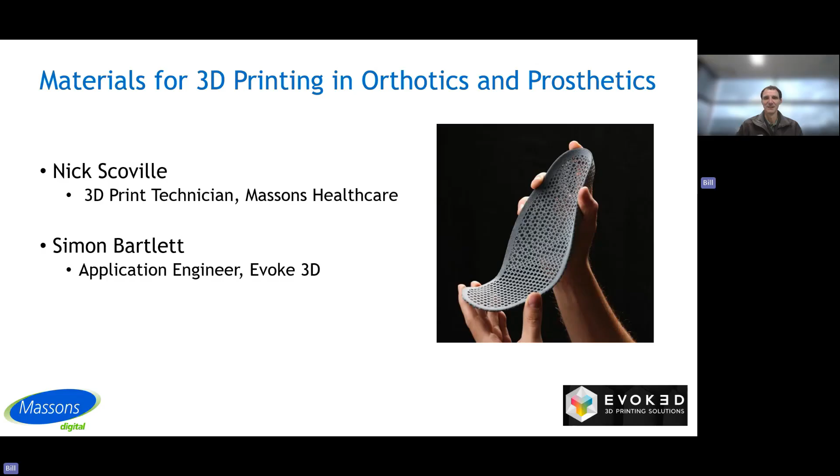I worked predominantly in the automotive industry for about 10 years and started 3D printing, started my own business about 25 years ago now, working with multiple technologies. But my key role during that time is to be a facilitator, to help individuals or companies take applications or ideas to market using additive manufacturing.

My role within Evoke is just that, working with potential machine buyers to make sure their application makes sense. Evoke itself is a supplier of end-to-end solutions for additive manufacturing. We do software with the likes of nTopology for digital workflows.

We are the sole agent for Australia and New Zealand for MJF, for HP technology, and then post-processing as well. We've got multiple technologies for vapor smoothing, which Nick will talk about, but also forms of mechanical finishing too. Something which we put a lot of effort into is servicing as well. As a machine owner myself and a business owner, I know the pain and the costs that machine downtime causes, so we spend a lot of time making sure servicing is at the front of everything that we do.

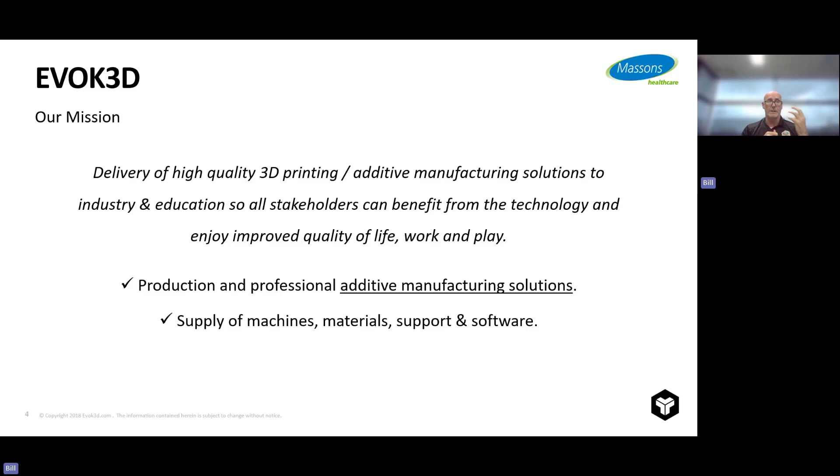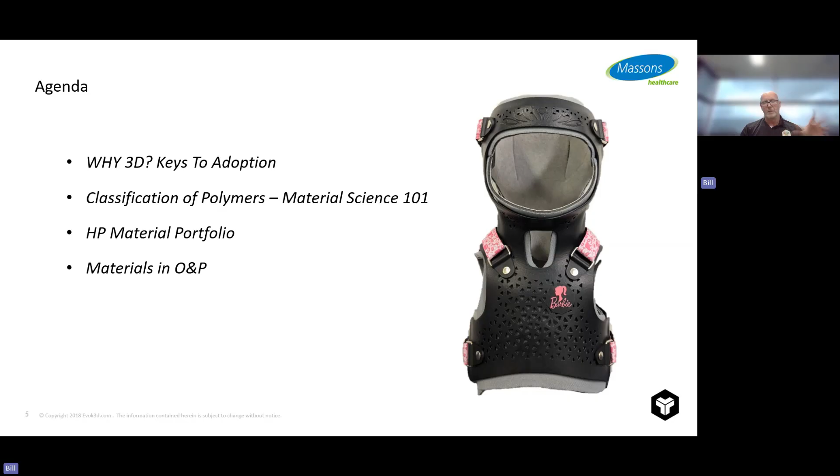So the agenda for today: what I'll be covering, and I'll do my best to try and make the science of materials somewhat interesting. Going through the keys for adoption, because we always need to be mindful of why 3D, the classification of polymers and a little bit of material science. We'll go through very quickly the HP material portfolio, and then also some of the work I've been doing in this field and the materials surrounding O&P.

So starting with keys to adoption. The last thing we want to do is actually replicate what you're actually doing now. So everything which we do when we talk about 3D, we need to think about value add, and the 5 key pillars to value adding.

So we talk about complexity. Remember, 3D printers are effectively a dumb machine, so they'll print anything that you've got. So part complexity does not, particularly with the HP technology, slow down or add print time.

Part consolidation - this is talking about doing more with less, so reducing part count. Anything which we can incorporate into the design to print as a single piece makes sense, again because complexity comes for free.

One of the key benefits too of 3D printing is being able to print on demand. So we're able to go from a push supply chain to a pull supply chain, and we can align with what production requirements are. The next one, enabling functionality.

Remember too, we can add lightness, so we can use lattice structuring etc. We can make areas thin or thick, so we have the ability to tune a part depending on the end requirements.

And particularly relevant to what we do in O&P is this personalisation and customisation - every part we produce is different. So it's always pertinent, when looking at adoption, to make sure you're not just replicating what you're doing now, but adding value. The more of these boxes that you can tick along the way, the more benefit you're able to bring by moving towards 3D.

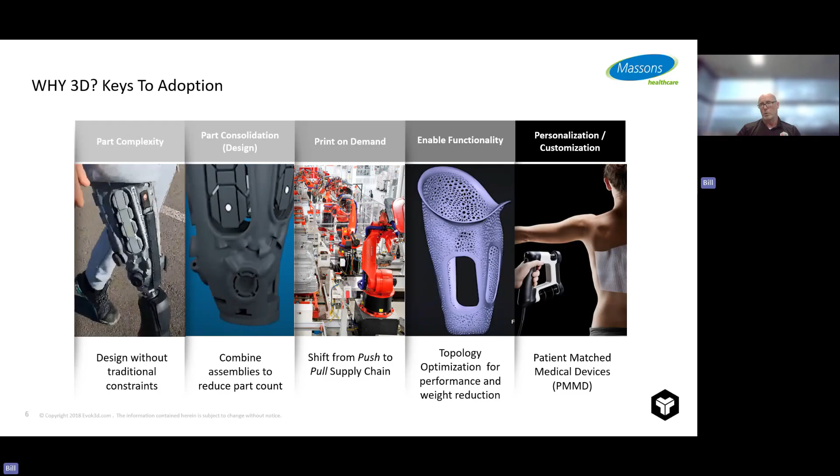Okay, the heavy part of today is talking about material science. So we're talking about polymers. For anyone versed in their Latin, polymer is broken up into two: poly meaning many and mer meaning units. So when we talk about polymer chains, it's actually a link of multiple mer, or multiple units.

So then we break that down from polymers, plastics, into thermoplastics, thermosets, and elastomers. And then we can break thermoplastics down even further, and this is where we want to focus today, into semi-crystalline and amorphous. Semi-crystalline examples are nylon, polyester, polypropylene, where amorphous materials are more your ABS, polystyrene, polycarbonates. We'll go down a little deeper about the differences between those two as well. And then over to our right, we're also talking about elastomers, so TPUs.

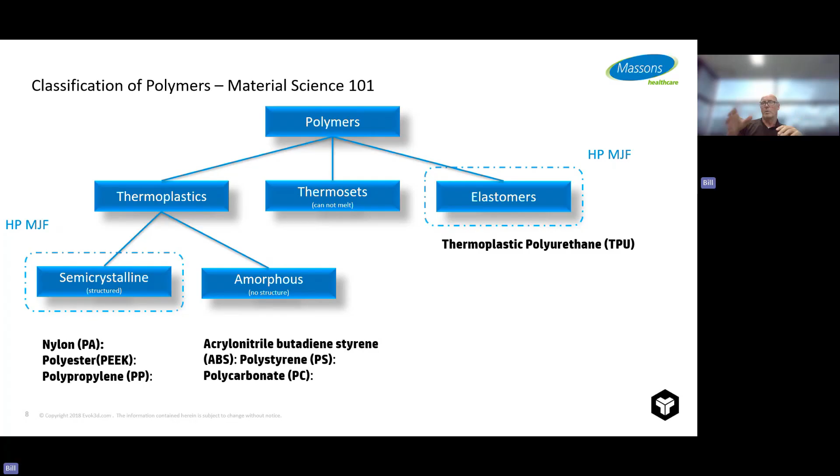So the technology which Massons have here, specifically we're looking at semi-crystalline materials, and predominantly the family of amides or polyamides, and also elastomers and TPUs. So again, the boring sort of slides, but it's interesting to note that the images you see there really do help to dictate or characterize some of the attributes of the materials.

So for an amorphous material, if you imagine, it's a random bunch of polymer chains. Now, one of the key differences is that amorphous materials don't have a specific or defined melting point, so they go soft and flow, whereas with crystalline materials we have a very defined melting point and glass transition temperature. Some other differences too, in terms of ductility and strength. Amorphous materials have a tendency of having lower chemical resistance, and they're quite often transparent too.

Whereas on the other side, our crystalline and semi-crystalline materials, these polymer chains, are a lot more uniform, a lot more ordered. Now, what is unique, they have a very good, or very controllable, window of their melt point. They have a lot higher strength and stiffness and wear resistance, higher chemical resistance as well, and they're generally opaque.

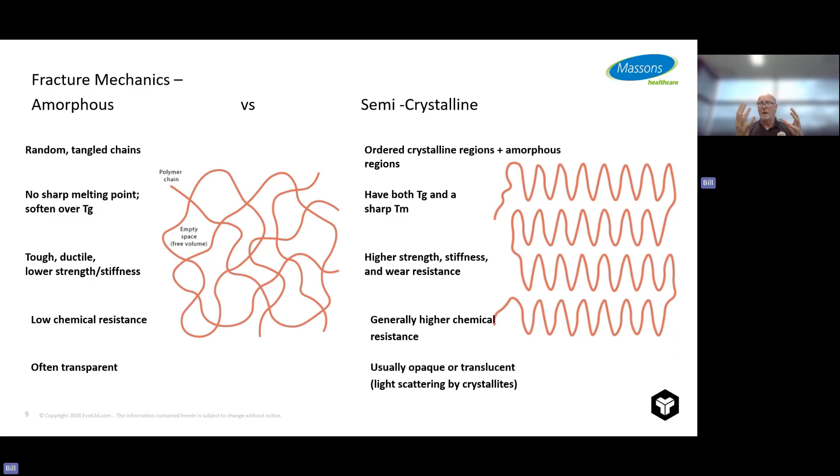Going into that a little bit deeper, it's mindful to just remember those graphics of the polymer chains. So amorphous materials like ABS, ASA is another one, have a tendency to shatter. And that makes sense too - if you imagine those polymer chains, when I'm applying a load, the load or crack as it propagates is going to go through those polymer chains to find the weakest links. So that's why we get a shattering approach, as opposed to a semi-crystalline material like nylon.

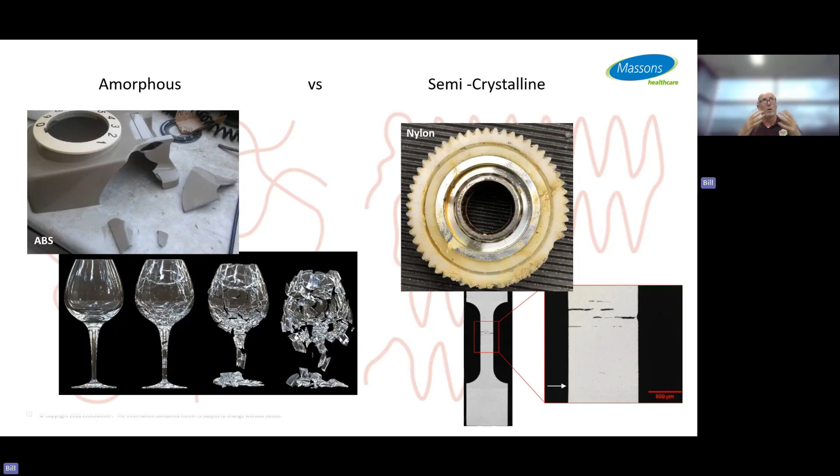And we've got a gear there - nylons are used extensively for gears. Here we have a very defined crack propagation, and that's also shown in that tensile test bar. So the crack actually propagates along that controlled, or ordered, structure.

Now, this is where it gets interesting. One of the things to remember from the earlier slides was having a very definitive, very defined melting point. This is why we use semi-crystalline materials in powder bed technology. For instance, the optimum operating window for polypropylene in HP technology is only plus or minus 1 degree, around 180 degrees. That plus or minus 1 degree makes the difference between being able to print a part and not print a part.

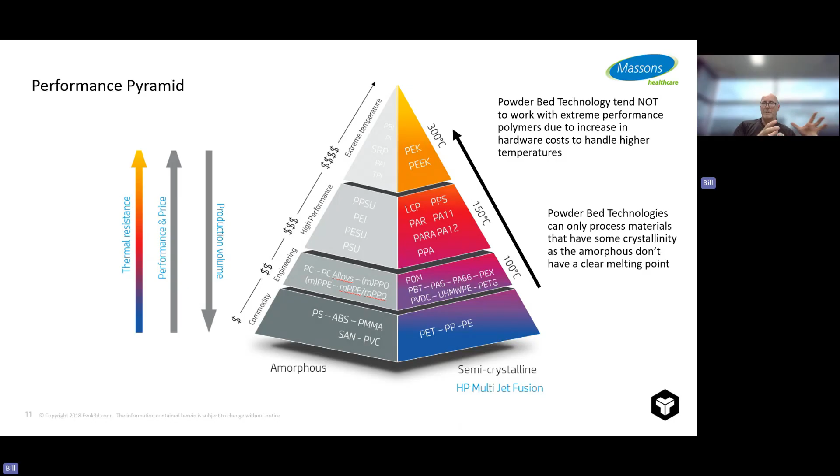That's not to say powder bed technologies can't move up this pyramid - they can print some of the PEK materials and PEEK materials. FDM is also very common for ABS and can also do PEEK. But what comes with that is machine complexity. If we need an operating envelope of around 300 degrees, that becomes a lot harder to control, and it makes the hardware itself a lot more expensive. So we have this rationale to use more commodity type materials, not only because they have a greater number of applications, but also because it influences the design of the hardware.

All right, having a quick look at time - regarding the material portfolio HP has for their technology, we have a range of polyamides, PA11s and 12s, etc. We have polypropylene, and we also have a white material now as well. Which material you end up using really comes back to the application, and we'll dive deeper into that.

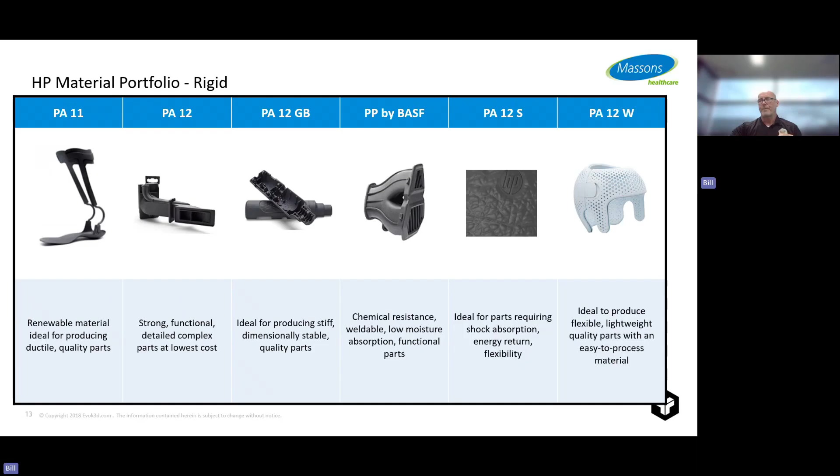When we talk about control with the HP technology, we can control a number of attributes in terms of temperature and agents, predominantly to give us different mechanical and physical properties too. For instance, looking at electrostatic discharge, we can vary the amount of carbon we're putting into the part, which allows us to dissipate a build-up of static, as an example.

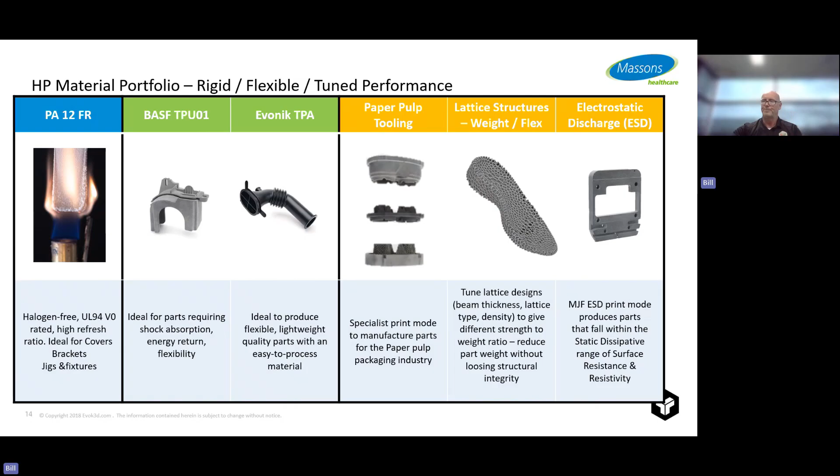But this is where we now start to get into the nitty-gritty, what I as an engineer typically term death by data sheets. Every material supplier, every hardware supplier will give you a telephone book of data sheets, but really the key is trying to digest all these materials and understand what they actually mean. One key takeaway from today is yes, data sheets are great, but it's actually understanding what's happening behind those data sheets.

So this is where we want to be in terms of thinking about if anything's got to flex or be stressed, etc.

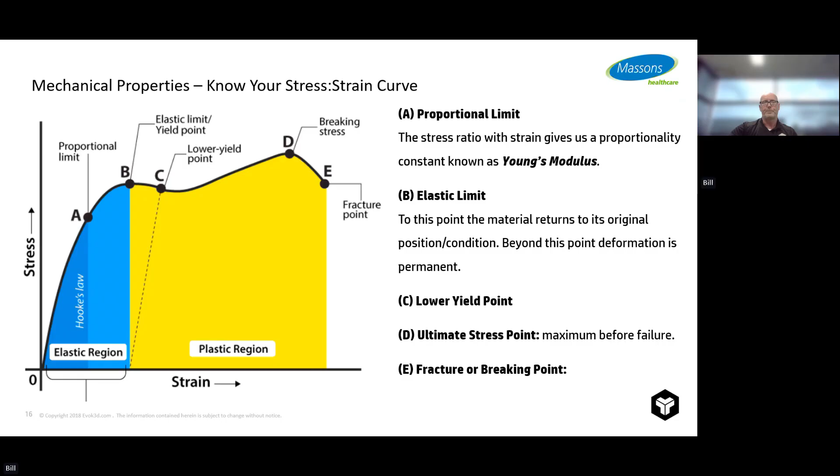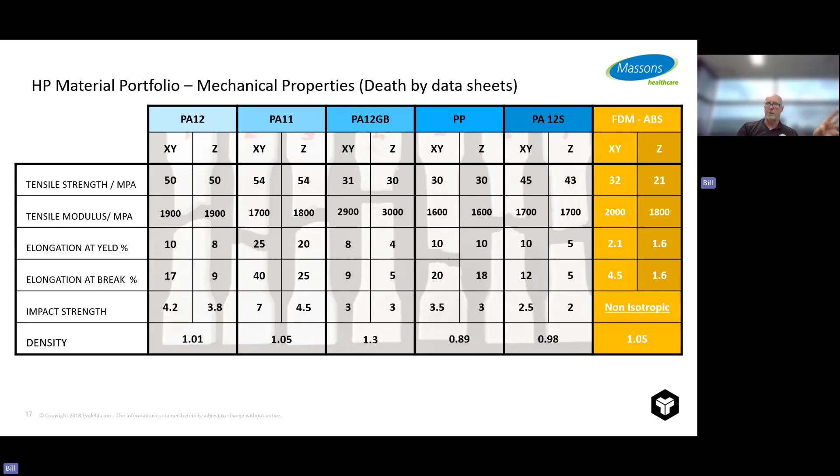One of the other things worth talking about, which I'll briefly touch on, is this death by data sheet. So we've got all of our mechanical properties for the HP, or powder bed fusion technology, polyamides. Then on the right-hand side, I want to show you an example from FDM, because I know a lot of people tuning in this morning will have FDM machines in their workshops.

Now, what's of particular note from this data is that with the HP technology and powder bed fusion technologies, you get very close or the same material properties in X, Y, and Z. That's what we call being isotropic. Whereas if you look at the FDM material, depending on the build orientation, whether X, Y, or Z, you see a 30% drop off in terms of tensile strength.

But then also, if you look at the elongation at break and at yield, you see quite a dramatic difference as well. It's actually lower, but a dramatic difference depending on the direction the part is printed, which becomes a lot more important, particularly when you're producing something like an AFO, where build orientation can have a dramatic effect on how the part performs.

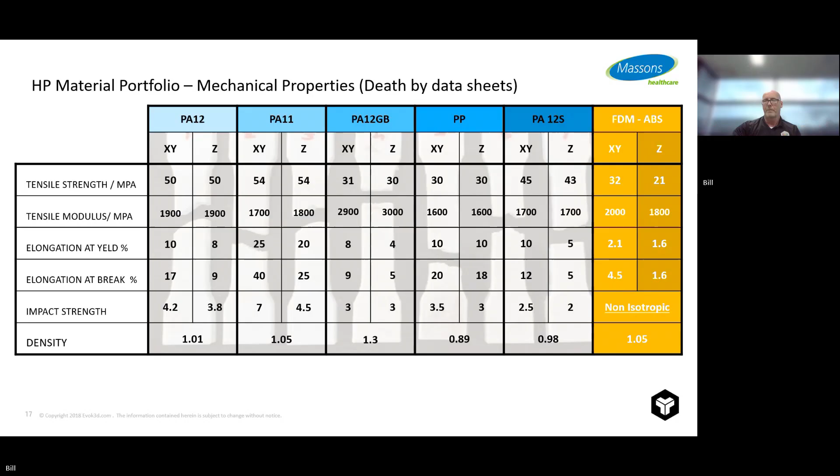But what does all this mean? Again, I'm a mechanical engineer, not a clinician. So how do I, on my day-to-day, when working with something like an AFO, think about this? I actually start on the right-hand side.

One of the things we've spent a lot of time on is building up what we call a finite element analysis, or the model. Effectively, once we draw something in CAD, we wrap a mesh around it, and with that mesh we're able to apply this stress strain curve at every node. Then we plug in the loads, to simulate load bearing and weight, and we're effectively stressing the part.

The area which is then highlighted there is an area common to what we call frog mouthing. If you look at the colour map, some of those areas shown in red, what we try to do is make sure those areas of stress are actually below what we see on our data sheet. So it's having a balance between the two, making sure anything we see on the data sheet is only going to stress the part within that elastic region.

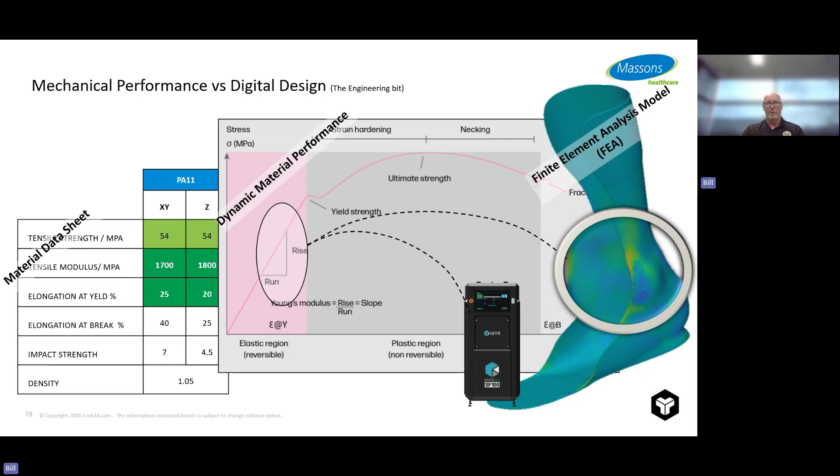And with that, if you want to know more about what I was just talking about, I'm actually presenting at DAOPA later this year, between the 16th and 18th of October, talking about having this feedback loop and testing.

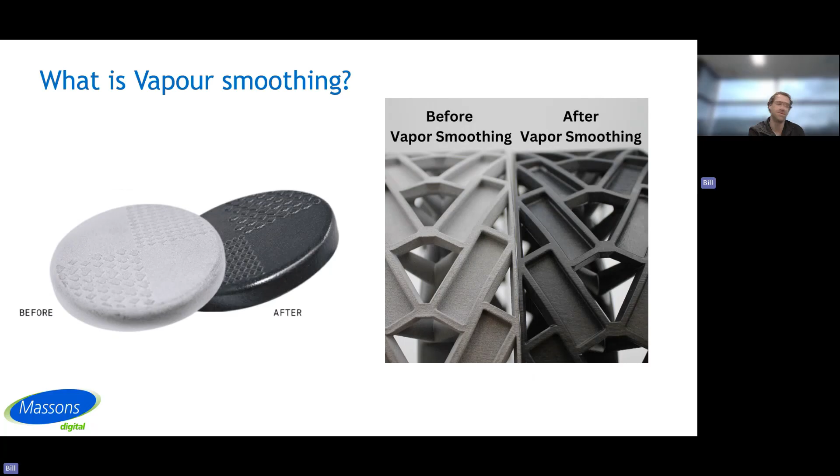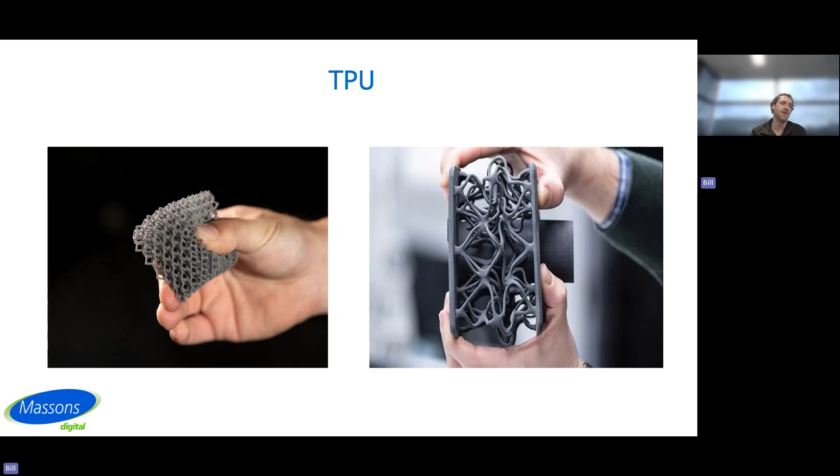First one that we print in is TPU. It is a rubber-like material that is very similar to flexible thermoplastics that we've used in O&P for years. It is the material that we print with that requires vapor smoothing to achieve what's known as optimal tear strength. So what is tear strength? Tear strength is also known as tear resistance, and it simply measures a material's ability to withstand tearing forces. In our typical applications here in the O&P industry, it's an important factor to take into consideration since devices in our field are really known for taking a beating.

The other material that we print in is PA11, and it is a high-performance thermoplastic derived from castor beans, known for its excellent mechanical properties, impact resistance, and its bio-based source. Unlike some other polymers, PA11 is known for its flexibility, making it ideal for parts like hinges, springs, or in our cases, AFOs and prosthetic devices.

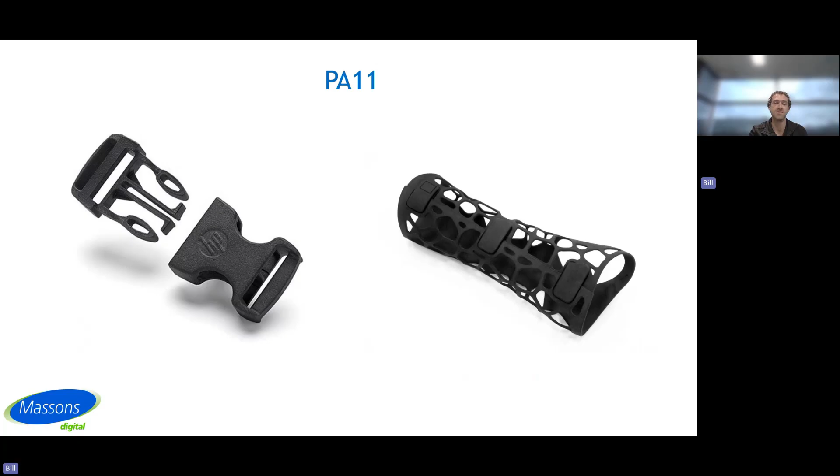So how does the vapor smoothing process work? During this initial step of part conditioning, the parts are conditioned in the process chamber to ensure they reach optimum processing conditions. This includes pressure, heat, and solvent amount. During the processing stage, the vaporized consumable is injected into the processing chamber, evenly smoothing the part surface under highly controlled conditions. These are the 3 factors that we can change to fine-tune the recipes that we process parts with.

During the curing stage, the parts are cured and the consumable is removed from the surface of the part, causing it to re-solidify, and this completes the smoothing process. Only after drying, which can take 1 to 2 hours, does this stage ensure no residual consumable remains on the material, and the part is ready for end-use application.

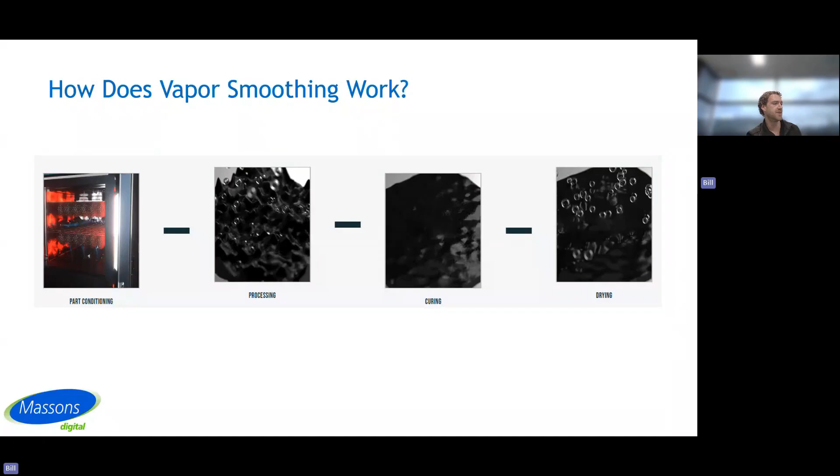A few things I wanted to chat about when it comes to designing for vapor smoothing: variable thickness parts, through holes, thin wall warping, and how to hang parts in the machine.

Variable thickness parts, the parts we tend to design in this industry, do require different thicknesses to achieve different outcomes. While we can achieve great results with variable thickness parts, we should try to design smooth transitions between the different thicknesses. What you see in the image above is known as bridging, and this can happen where two different geometries meet at a 90-degree angle.

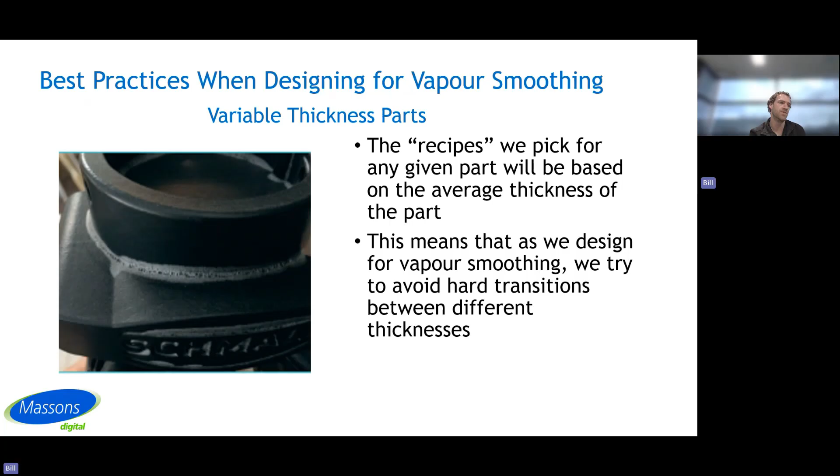Next design consideration to take into account is through holes. A through hole is any opening that allows air to pass through the part. In this process, allowing the vapor to pass through a part will ensure the chemical is able to reach all sides and evenly smooth the part.

Prosthetic liners are a great example of what's known as a blind hole. In most cases, there is a cup at the distal end of the socket, which makes it difficult for the vapor to evenly smooth the parts. This is unavoidable in some cases, and steps can be taken on our end to achieve the best result, which we will always do, but know that it's possible for the device to smooth on the outside more than the inside in these cases.

Liners that have a hole for air expulsion, or a large disc-like distal component, are best suited for this process.

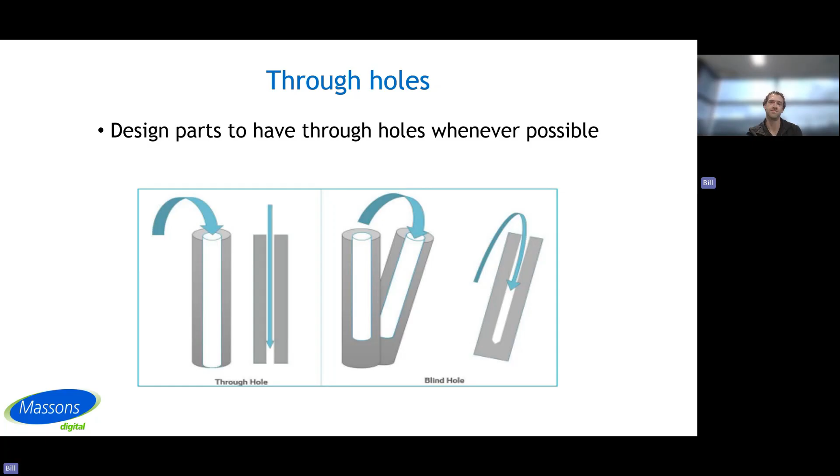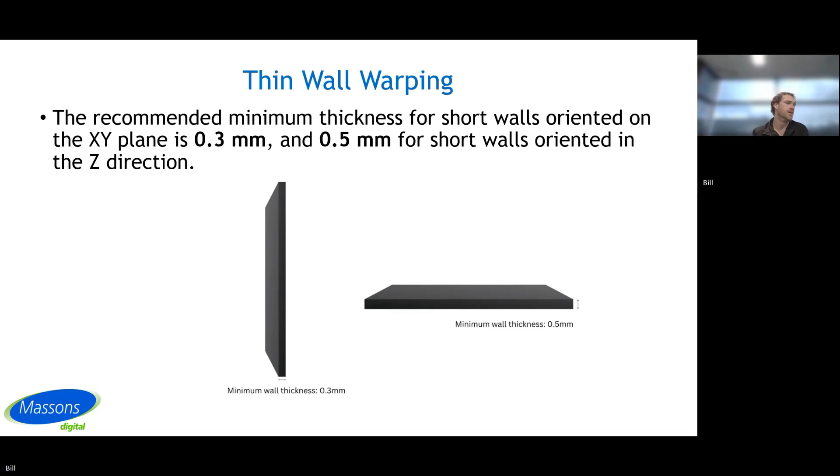Another thing to take into account is thin wall warping. The wall thickness for vapor smoothing is very similar to what HP recommends for MJF printing, that is 0.3 millimeters in the XY plane and 0.5 in the Z direction. Going below those numbers can result in warping surfaces.

Hanging parts in the machine: your parts will be hung in the best orientation for optimal smoothing, but witness marks, which I'll show on the next slide, are possible. Those can be avoided if you design a sacrificial hook that would be removed after the fact. This material cleans up well, buffs very well, and dyes very well.

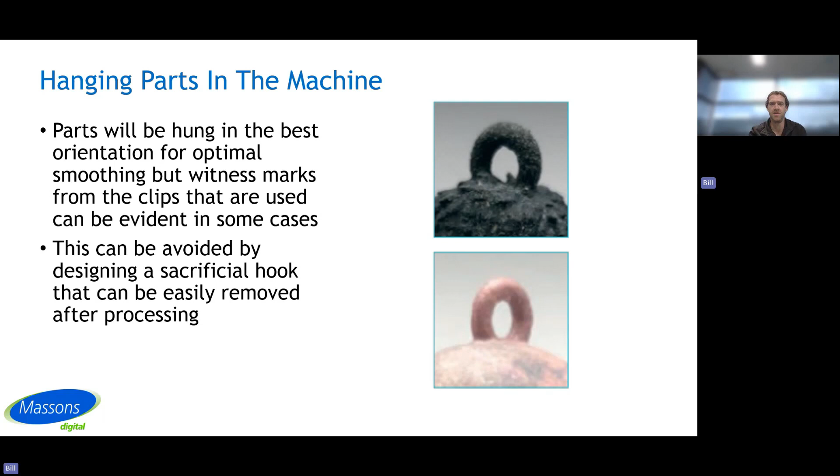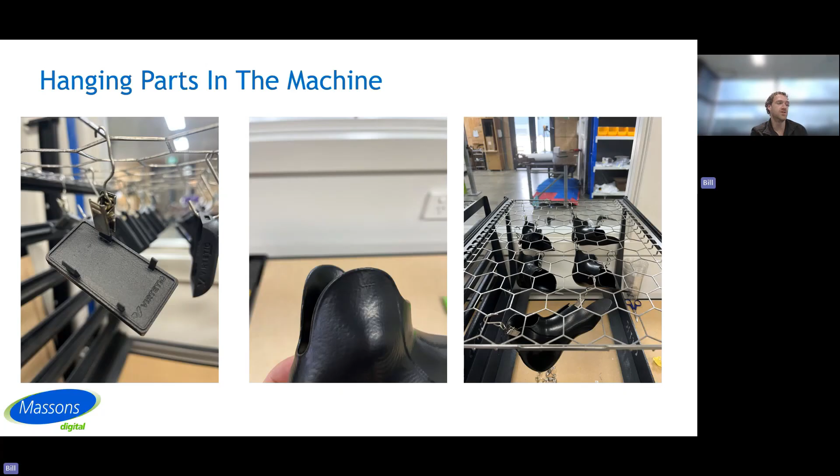This is key to achieving consistent smoothing, and we will always try to hang your parts in the best possible orientation. That's not something you have to dictate to us.

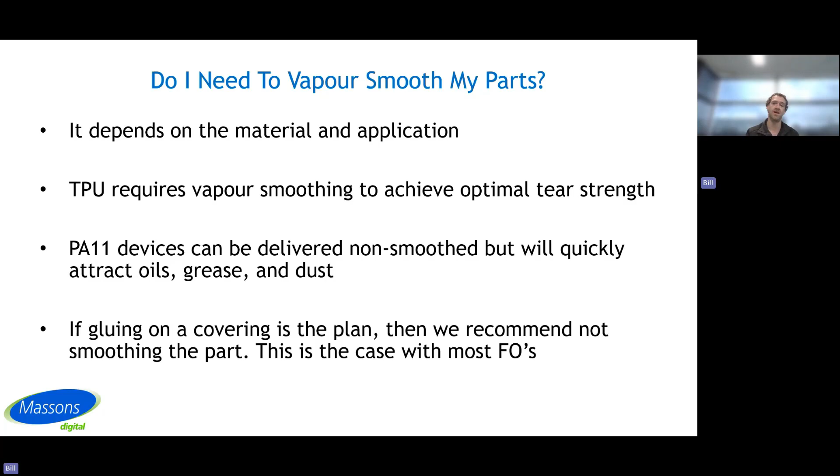That'll wrap up my information on vapor smoothing. If you have any other questions, feel free to reach out, and I will hand over to Bill for closing up.